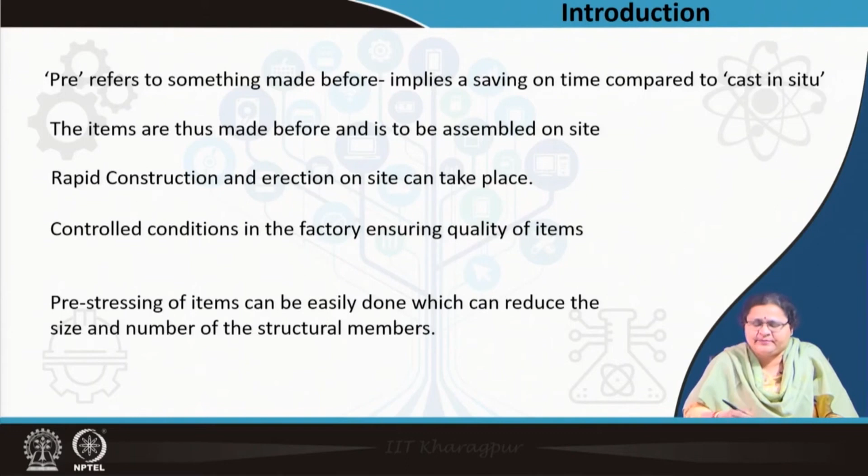Pre-stressed items can be made in the factory. What is pre-stressed? The reinforcement, that is the steel bars inside the structure, because these are quite long or large structures; concrete is good in compression, you have to use steel to take the tension. So, these steel rods can be pre-stressed and embedded in the concrete. That can reduce the size and number of structural members, so you can have bigger, larger panels for walling or roofing, and an entire building can be made from precast walls, floors, foundation, columns, beams.

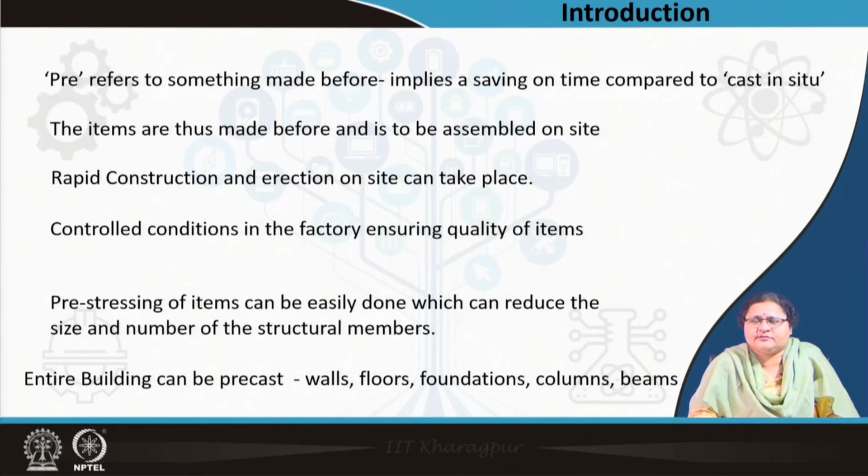Other than these, we will discuss that a little later. So, now let us discuss the advantages. We can start a precast or prefabricated system when there is a large amount of order. Without that, the factory cannot survive. You cannot just ask for one residence to be made as prefabricated.

So, that should come into practice, and I inform you that the Building Materials and Technology Promotion Council, BMTPC, is a technology promotion center. They have given 16 items which are not all fully prefabricated, but some are partially to be done on site. So, you need a large amount of order to make this system sustainable.

If that is done, then you can make a saving on cost. This cost implies the cost of production. When it is large scale, it becomes industrial and the factory actually survives. So, our age old system must be practiced, but this should also be welcome.

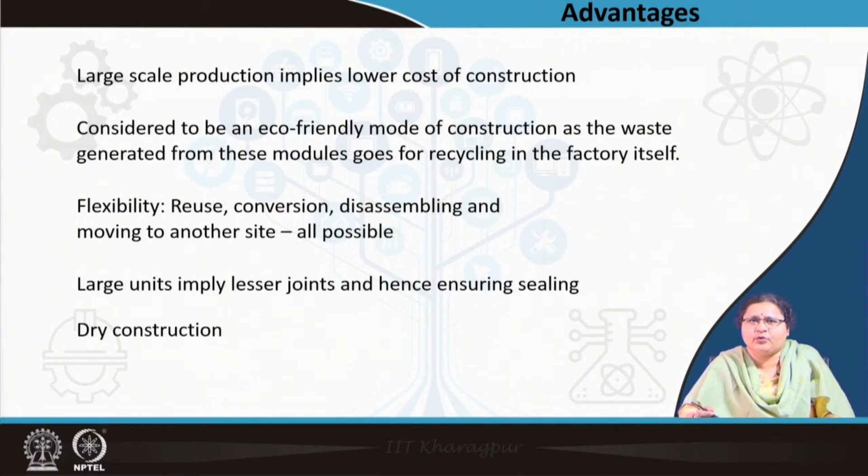There is no involvement of water, because whatever wet work there was, it was all finished in the factory. So, here you are getting a dry item, you are fixing two dry items, five dry items one after the other. You can do it in a waterless manner. So, it is a dry construction entirely.

Now, I expose you to some pictures. This hollow concrete block which you see in the first picture resembles more or less a brick, but it is larger in size than a brick. These are cast special units for connecting one after the other. You can check here, there are some notches; here it is different, this has a flush end, so there is no notch. When you are beginning your construction, you can start with this.

When you are using these ends, you can interlock it. We will go into a little detail in our next lecture maybe, but these are the first precast units, masonry units, called concrete masonry units. What you see in the picture below is the concrete wall panel which I am talking about.

Now, you see here a series of panels of different sizes kept. Some may be floor to floor, some may be for the plinths, and you can see some details; they are not clean items, you can see some cuts, there may be some notches, and those are for fixing. And you can understand from this size and this picture, they are not humanly possible to lift into position.

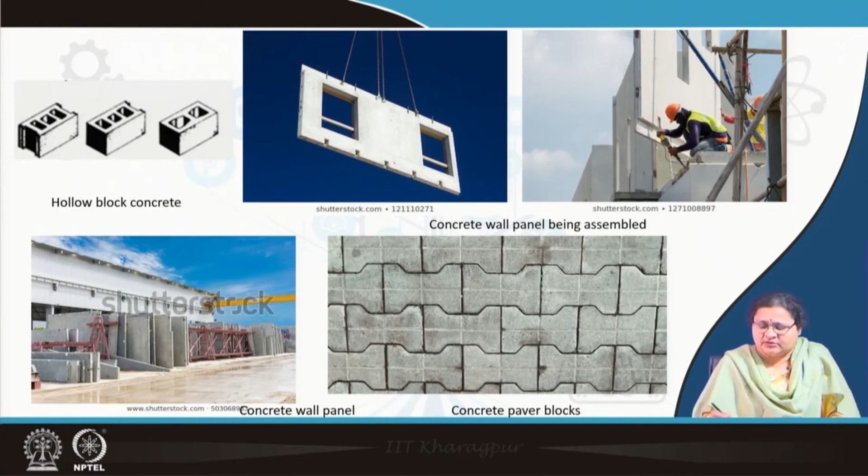Here you see some more patterned items. These are paving blocks. These are also precast concrete units. So, in our basket we have so many things. We come to the roofing part. In this picture you see there are a number of sections. We will elaborate on these later. Some are hollow; the blank spaces are hollow. Some may be solid, and some dots you can notice. These are all reinforcement marks; it is a schematic picture.

You can see some units assembled one after the other in this picture showing a small span flooring unit, and you see on top of it, it is being covered with some material to make the floor flat. In this case, the flooring unit as you see in section is flat. Here you see there are lots of notches. So, on top of it concrete is filled in to make the floor flat or usable. These units are for large span, these are for small span.

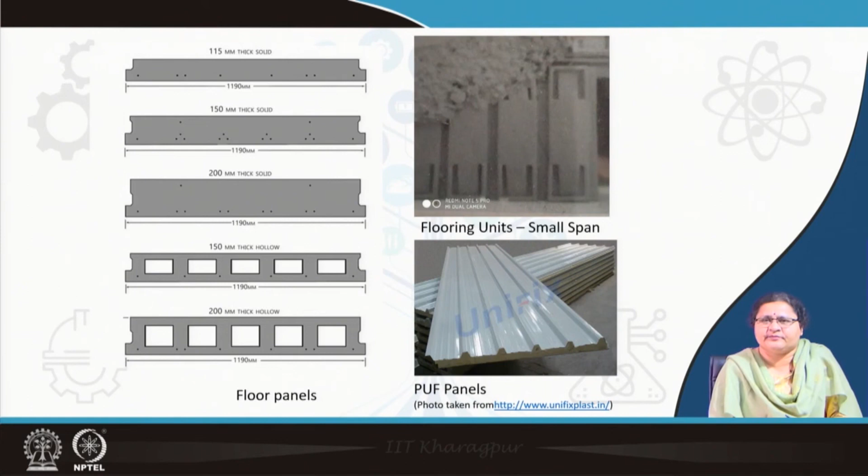By this time you are almost thinking that everything is of concrete. Yes, it is mostly concrete, but we also have prefabricated panels, as you see in this picture, which are PUF panels, polyurethane foam panels. There is a metal sheet on top of it. These are also walling panels. So, there are various kinds of prefabricated items, mostly made of concrete. They are durable, they give you speedier construction, and the limitation is you have to go with a preset dimension.

So, you have to go for modular construction, repeating sections, items, shapes, forms. That makes it industrial, that makes it possible for a factory to make a large number of units. Otherwise, if you keep on changing your design, if you keep on changing the module, you will keep on changing your order, and that may not be possible for the factory to supply.

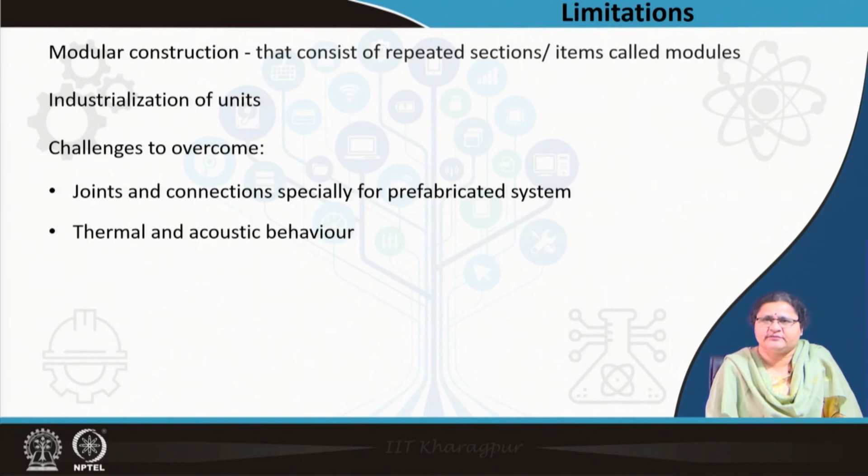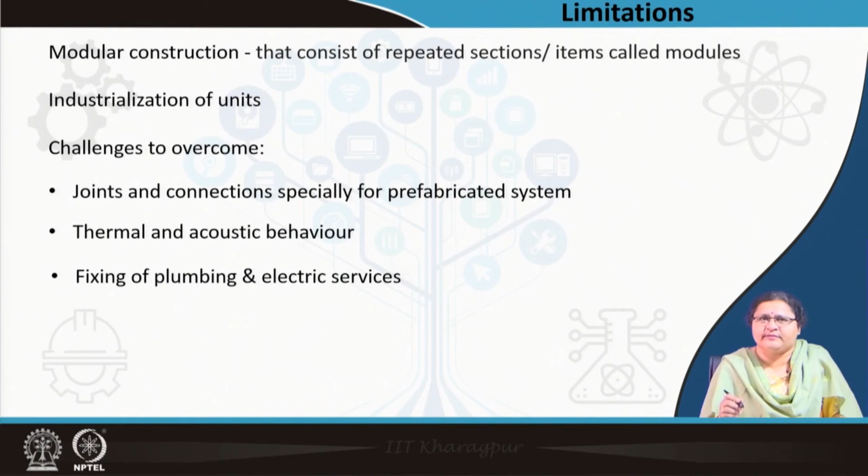Challenges to overcome are the joints and connections, especially for these prefabricated systems. It is not like joining with mortar. There is thermal and acoustical behavior which may be a limitation. You may have problems in fixing the plumbing and electrical services. So, you have to plan for that, because not all panels will be carriers of electrical lines or plumbing lines. You have to be very particular, because without services a building cannot survive. So, these are to be pre-planned, provisions are to be made, and that becomes a challenge.

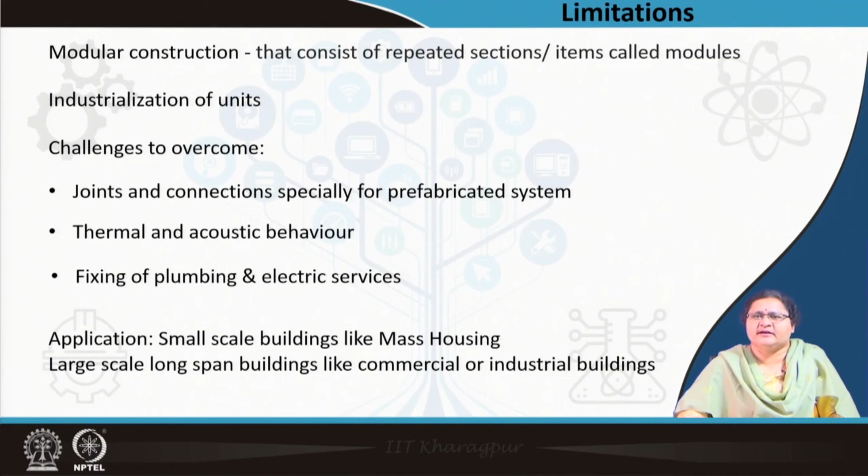Where can it be used? As I showed you, small scale roofing systems and small scale wall panels can be applied in small scale buildings like mass housing. You have a few floors of the same plan moving up, you can actually use it, or else large scale long span buildings, commercial buildings, industrial buildings. You can create large spaces, large office buildings, large floor spaces, and inside you make compartments. So, for a large scale, long span building, you can use pre-stressed panels and develop a prefabricated or precast system for that.

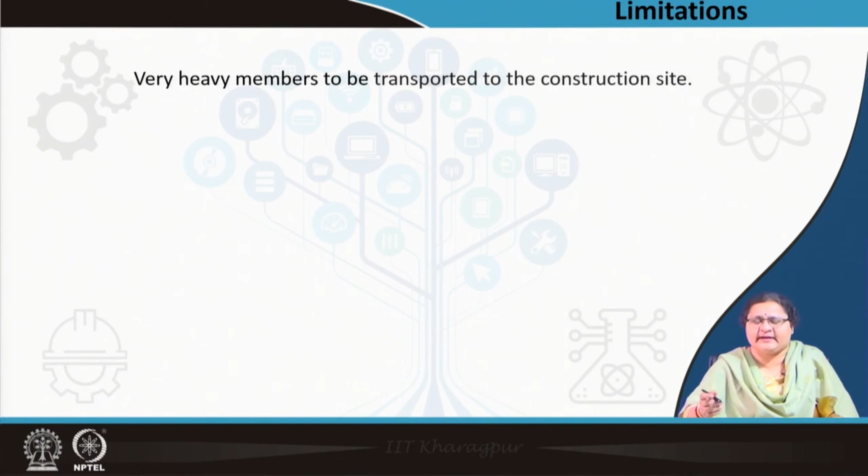Other limitations are, when it is a concrete item, however thin it be, it is very heavy. It has to be transported to site very precisely, very carefully, so that the corners, ends, edges do not break off, because they actually form the connections with the next item or the next panel. So, these members are to be transported very carefully. Heavy cranes are required with skilled operators to install the parts.

So, without a proper mechanism, you cannot actually operate the entire system, and that requires skill, which is lacking in our country context. So, not only can we propose a system, but we have to look into the education part, the technical part, how this can be installed in a better way. Very small margins of error are allowed. Because it is very precise, you have to have units one after the other, very closely packed. You do not have provision to put some mortar inside and fill in the gap.

So, the dimensions etc., and fitting and fixing is becoming crucial. Connections may be difficult. You have a beam column system, they are connecting to each other, because the connection will lead to the load sharing, transferring the load. So, these are the limitations.

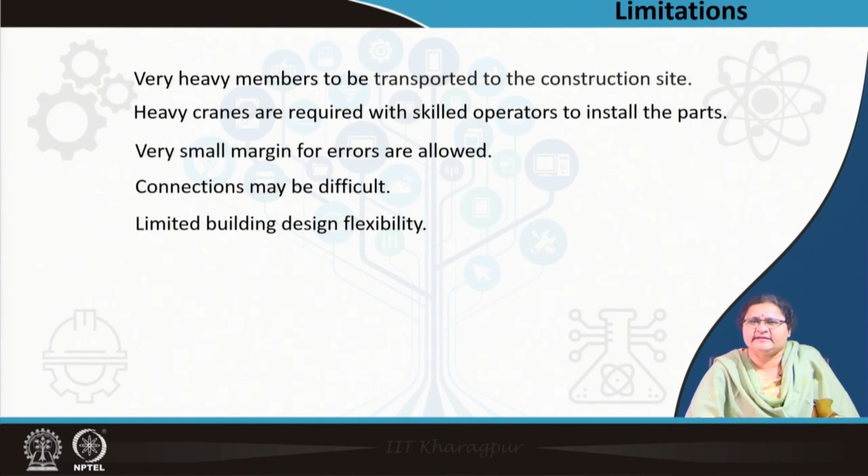Design flexibility: as I have already told, you cannot think beyond certain fixed dimensions or multiples of certain dimensions, and everything has to be prefixed, everything has to be designed. So, flexibility in design becomes a challenge. You have to follow given dimensions and finally it will become a prototype. Economies of scale are required for setup and run. As I have already told, factories cannot survive with very few such orders.

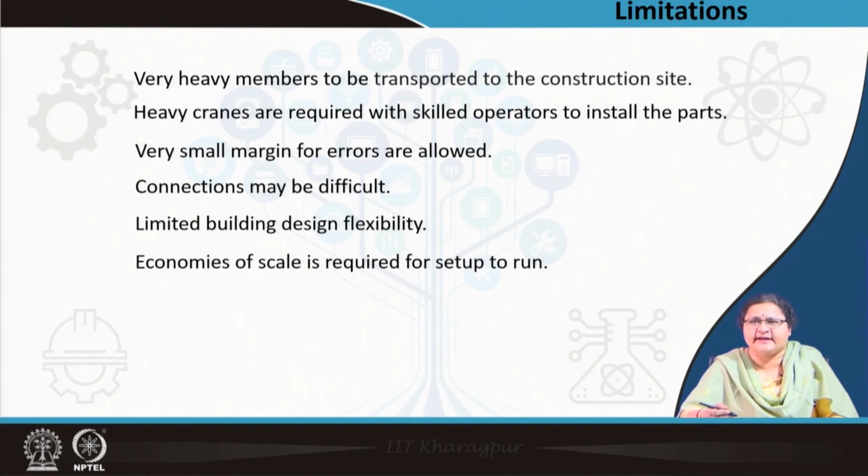It should be practiced in our country, as it is practiced in other Western countries where they have skilled labor, they have mechanisms to use it, the cranes, the movers, and there is lack of labor. Here in our country's context, labor may be available cheap, but it is unskilled too. So, to bring this system into prominence, you have to look at training these unskilled laborers to at least semi-skilled or skilled laborers who can operate such kinds of systems, the cranes etc., and you are taking a risk if you are not skilled or trained in this particular profession.

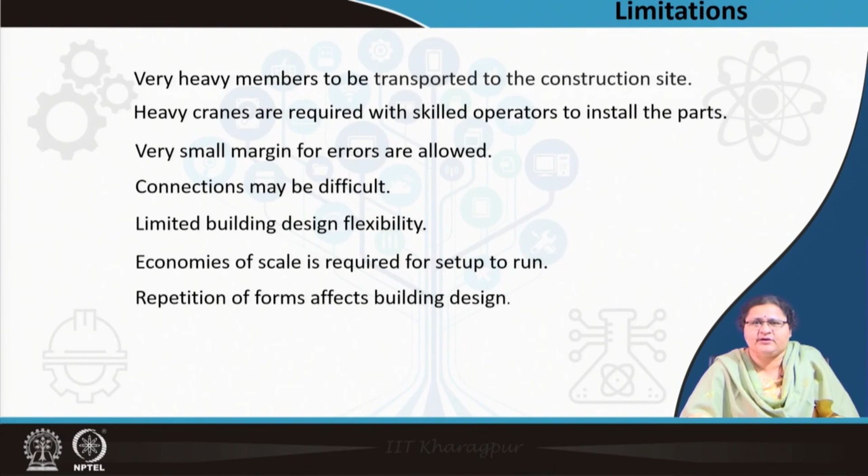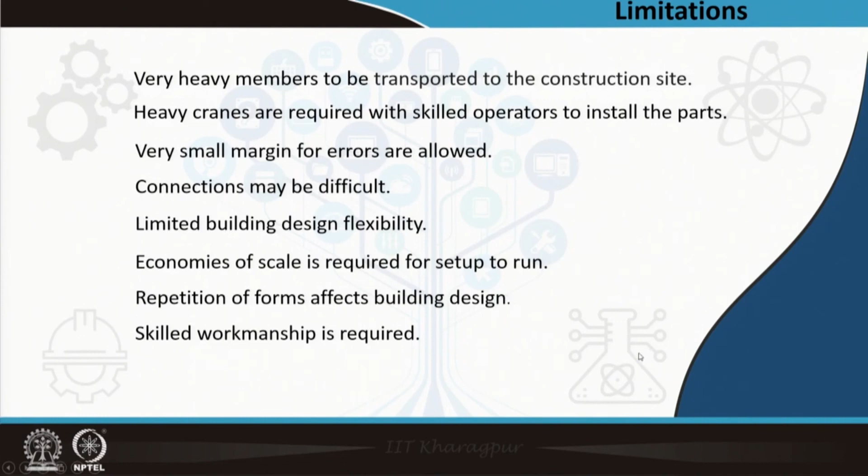Repetition of form affects building design. We as architects have to take this as a limitation, but within these limitations we also need to know these items so that we can actually make use of them and make faster movement towards fulfilling our aims like housing for all, etc. Skilled workmanship is required, as I have already told. So, all this becomes a limitation for our country's context at times.

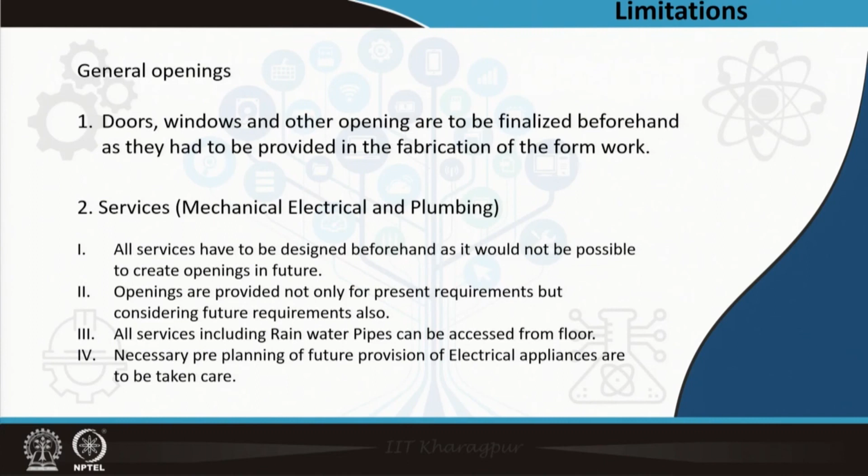Now, coming to the general observation, particularly the openings. I told you, you have to finalize them beforehand. You have to give them during fabrication and you have to know where they will come. So, proper understanding of how to organize the systems into a built form is to be known. Doors, windows, other openings should be marked.

Coming to the services, as I told you, the MEP, the mechanical, electrical and plumbing, all services have to be designed beforehand, as it would not be possible to create openings in future. Say in the floor, there should be proper holes to receive the pipes. On the wall, there should be proper holes to receive the outlets, overflow pipes. So, you will have a wet area, so you are actually having a very prototype design.

One particular bay can be dedicated to the water lines. Other areas will remain dry, where electrical and mechanical lines will be very important. So, rainwater pipes, etc. are to be planned. Water inlet and outlet from washrooms, from the kitchen, if you are having a residence, are to be planned. So, pre-planning and also future provisions are to be kept in mind before entering into such material design. As an architect, you need to keep in mind what kind of construction system you are going to face, and only then can you pre-plan the entire design accordingly.

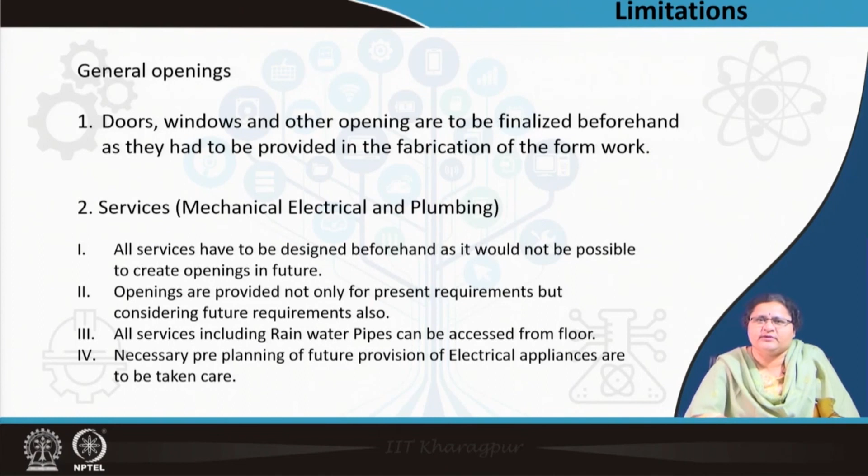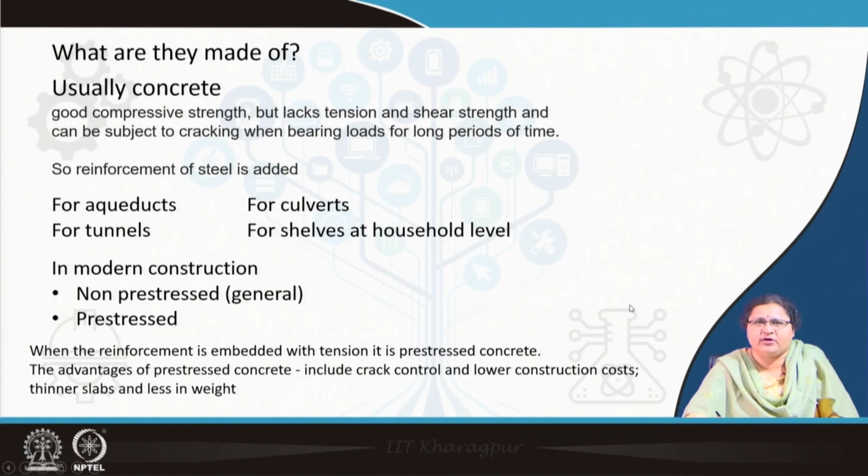We have the opportunity to use pre-stressed steel inside these precast items. Pre-stressed, as I told you, is when the reinforcement is embedded with tension in the rods. This is not possible in cast in situ construction; you cannot pre-stress the rods. In a precast system, you can actually pre-stress the rods and pour in the concrete. Then that becomes much more effective in taking strength and larger spans can be achieved. Thinner slabs, lighter in weight, can be achieved by pre-stressed mechanisms. Otherwise, you can always go for non-pre-stressed structures.

So, what are we going to cover? From the next module onwards, we will try to cover hollow block concrete, wall panels, one single thickness, one double thickness, paving units, flooring units for small span, flooring units for large span, beams, columns and foundation, ferrocement roofing channels, and we will also touch upon polyurethane foam panels, which are not made of concrete.